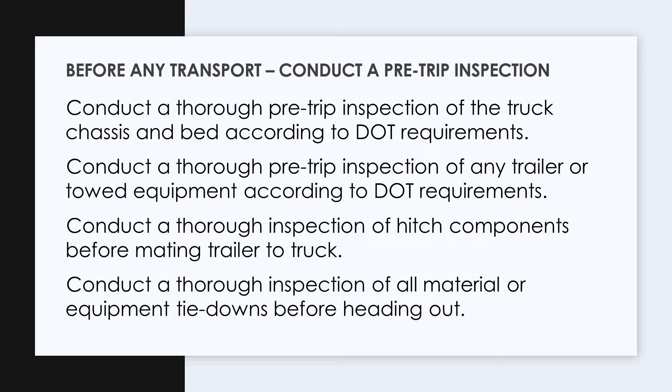We're going to put special emphasis on inspection and connection of pintle hook towing connections. These are among the most frequently used towing connections by utilities. They're a common heavy-duty towing connection, and they are not infallible. They can fail just like anything else, so they should be looked at closely, and you need to ensure their proper function and capability.

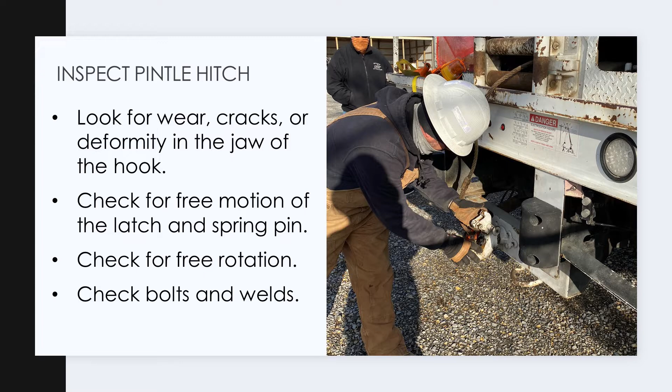First, inspect the pintle hitch. Look for wear or cracks or deformity in the jaw of the hook. Check for free motion of the latch and spring if it's equipped with one. Check for free rotation, and check the bolts and welds to make sure it's securely fastened to the towing vehicle.

Next, look for deformity or cracks in the ring or mounting base. The lunette ring is a critical component, and we'll talk a little bit more about how to measure that. Check for wear of the ring and check with an appropriate gauge. Also, make sure again you check bolts or welds. These are common fail points.

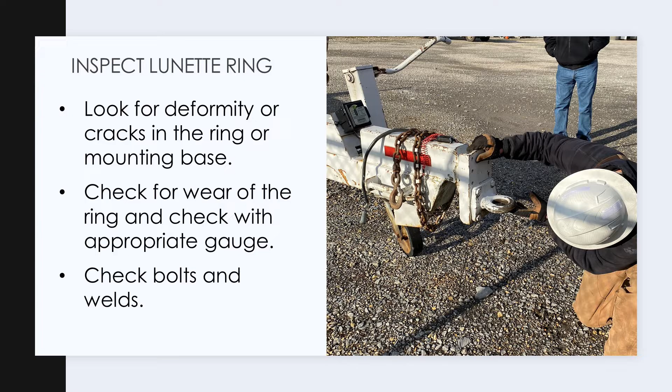A number of manufacturers and suppliers have for sale rings that are specifically designed for checking the wear and capabilities of lunette ring hitches. We do not promote any particular brand, but we do highly recommend that you obtain one or more of these gauges and use them regularly in your inspections. Keep in mind, this inspection is not just for your annual DOT inspection, it's for regular periodic inspections before use.

Check your safety chains and hooks. Check for wear or distortion of the chain links. Each and every link. As the old saying goes, a length of chain is only as strong as its weakest link. Check for excessive rust or wear at tow points or low points and attachment. The bottom of the curve is a typical drag point, and drag means wear, and wear means loss of strength. So you want to look closely at that section.

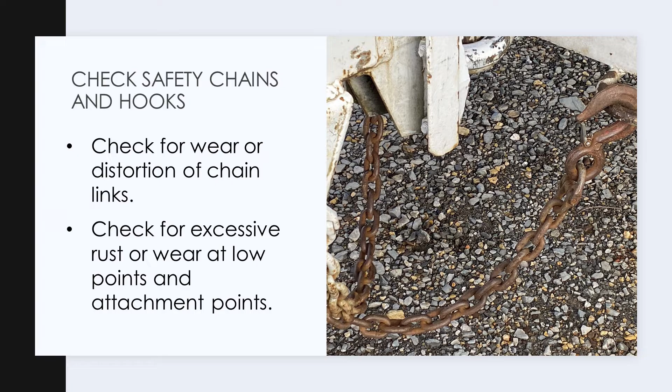Check hooks for cracks, wear, or deformation in the throat of the hook, along the shank, and in the eye. Verify the safety latch is in place and functional.

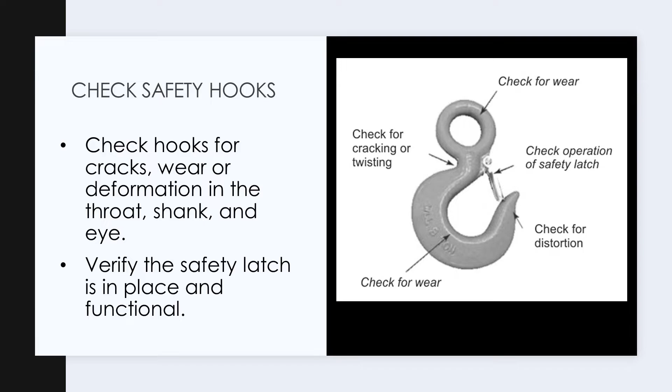Also, you want to check your connections. Ensure the chains are connected individually and securely. Cross the safety chains below the drawbar. Crossing of the safety chains provides a cradle so that if the tongue becomes detached, it will rest on the safety chains while towing and prevent the tongue from digging in and flipping the trailer.

Also, verify the length of the safety chains. There's been a recent change in National DOT policy, and rolling or twisting the chain in order to shorten it is a recognized and approved method for adjusting the length of the chain. Don't tie a knot in it, but you do want to roll it or twist it, or actually just have the appropriate number of links in the chain.

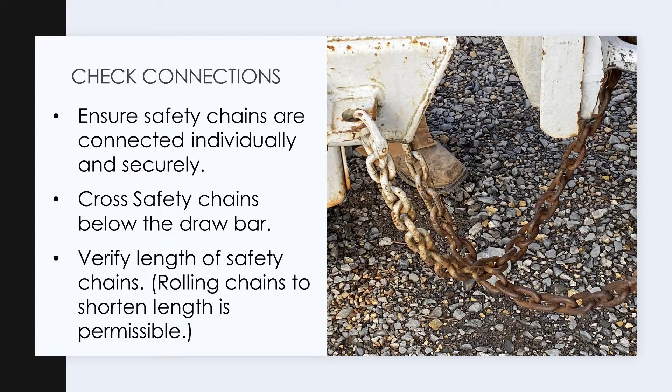Landing gear is a critical component of every trailer or towed vehicle. The landing gear keeps the tongue up when you're getting ready to hitch it. Be sure to fully stow the landing gear. Make sure it's completely swung or retracted. Use the provided locking pin or latch. If the locking pin is not functional, don't rely on a collar rope, chain, or strap to hold it. This could fail during transport.

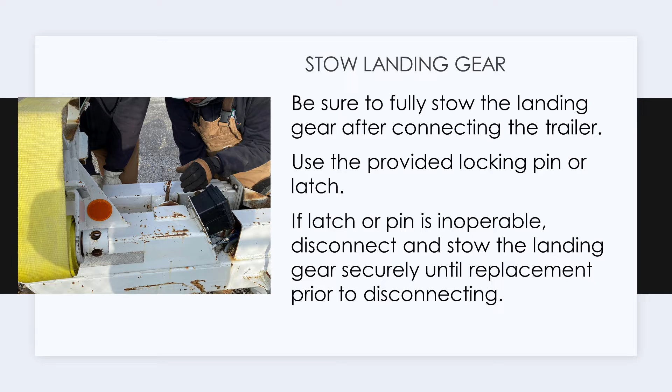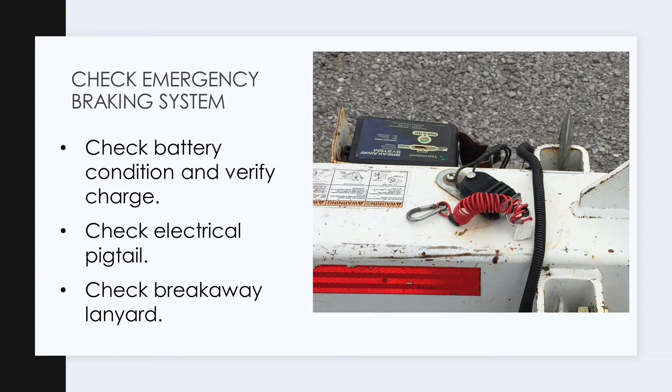Check emergency braking system. Check battery condition and verify charge. Check the electrical pigtail to make sure that it is in good condition and functional. And make sure that you check the breakaway lanyard, that it is in place and usable. Breakaway lanyard is a critical component of the braking system on the trailer. The last thing you want is a trailer passing you going down the road. There have been fatal and serious accidents that have resulted from the very same thing.

Likewise, in order to shorten the lanyard, don't wind it up or weave it through the safety chain. It needs to be a free and separate connection. You can either get one of the spring type connectors that takes up its own slack, or you can fold it back and use a clamp in order to make the connection the right length.

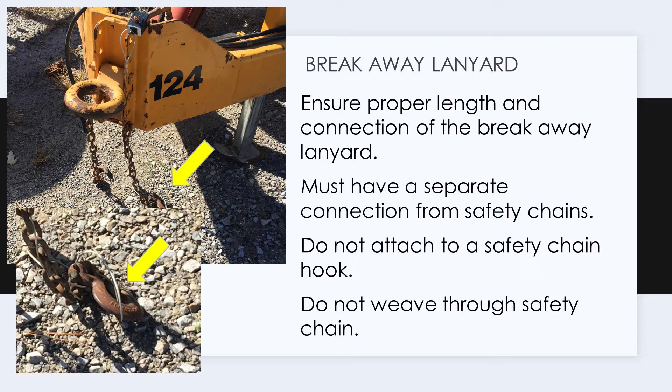Now we're going to move on to material loading, a few simple steps, specifically poles. We're going to be dealing with pole loading and hauling in a more lengthy program later on in the season, but right now we want to talk about just the very basics. And with any lift that you're going to make, especially with pole lifts, inspect your sling and verify the capacity. You want to attach the pole at the appropriate point so you have a good balance point. And then once you've got the pole on your towing vehicle, you want to make sure that you secure the load at both ends to make sure that it's in good shape.

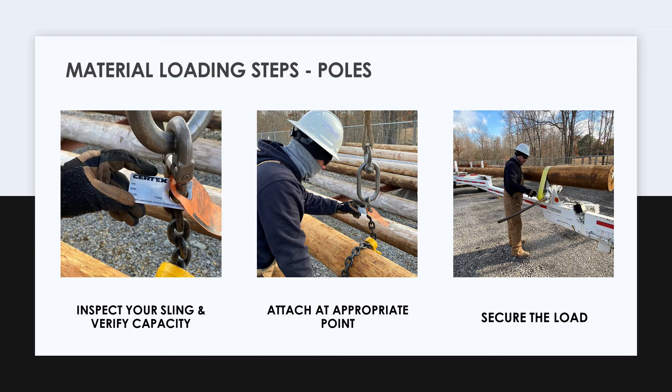Also, with an extended load, you want to make sure that you observe appropriate local regulations for marking and designation of an excessive length tow.

Materials, typically with transformers. Again, you want to inspect your sling and verify that the capacity is correct. OSHA regulations demand that the rating tag on the nylon sling be clearly visible and legible, so that you can tell exactly what the rating is on the sling. They vary from material to material and manufacturer to manufacturer, so you want to make sure that you get that right. You want to attach the sling at the appropriate points. You want to use a designated sling.

And it's a common practice to use a length of collar rope with a knot to make a sling out of it. JT&S does not recommend that, and it is not 100% in compliance. So use an appropriate sling for lifting and moving transformers. A length of so-called collar rope is fine for securing the load, but for lifting the load, you want to make sure that you have an appropriate lifting device or sling. And then secure the load in the cargo bay by whatever means you use. Some folks use a bolted secure frame. Some people use straps. Some people use a rope or other means of securement.

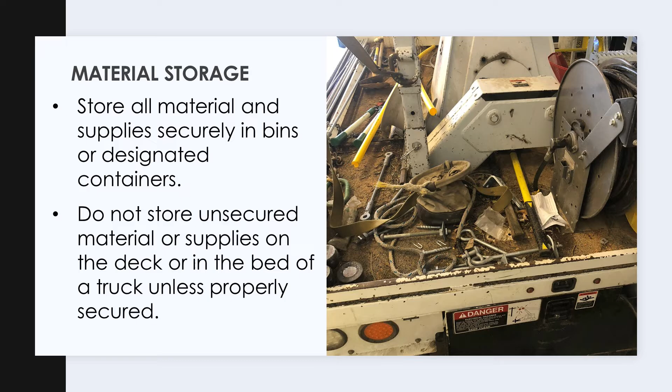Hauling equipment or material on a trailer requires securement that meets the Federal Motor Safety Carrier Administration regulations. More of us have equipment or material that we need to get out to the field now. We've got a lot of labor-saving devices and equipment that we get out there, a lot of new equipment that we use for access and difficult terrain. We can't just throw it on a trailer and throw a strap or a chain on it. We need to secure it properly and legally.

We've obtained a video from the Iowa Department of Transportation. This is available online, but it's an exceptionally good video with regard to the specifics. And these cover the federal regulations which apply for us here in Tennessee and in other surrounding states. As with all federal regulations, we have to at least meet these. And if there are any specific regulations that go above and beyond these, you can check with your local Department of Transportation or with the JT&S program or some other regulatory body. Be happy to clear that up for you.

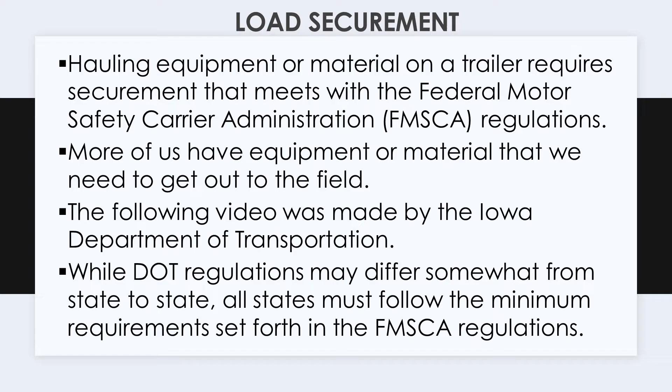But while DOT regulations may differ, all states must follow these minimum requirements from the Federal Motor Safety Carrier. So right now, let's watch this video, and we'll come back after the video is done.

Hi, I'm Officer Steve Robinson, Training Coordinator with Motor Vehicle Enforcement within the Division of Motor Vehicle, the Iowa Department of Transportation. We're here today to talk about chains and load securement, how to look at the chains, make sure you have the correct style chains and they're not damaged, and do a proper securement for a heavy vehicle. Before we start actually chaining down the piece of equipment, the first step is actually checking your chains over to make sure that they're not damaged and you have a proper type of chain to begin with.

Most of the chains that the Department of Transportation has are going to be 3/8" transport chain. And the way to check that is, first of all, you're going to measure the width of the strand, and then we're going to take a look at each strand and make sure that there's a marking somewhere on the strand that says G7, L7, or something with a 7 on it to show that it's a type 70 chain. If it doesn't have any markings on it, we have to take it back to what's called a type 30 chain, which is basically about a quarter of the securement value of a full length chain.

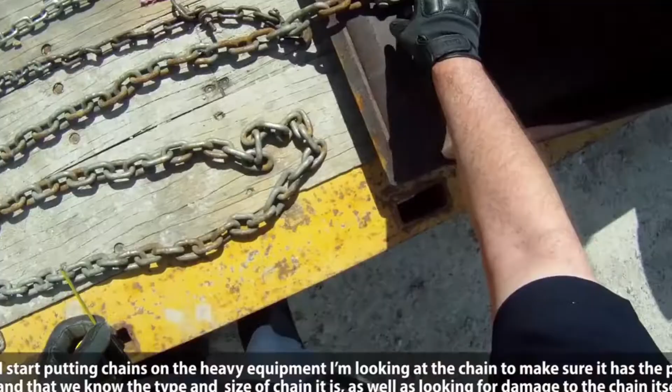Before I start putting chains on the heavy equipment, I'm looking at the chain to make sure it has the proper width, and we know what size and type of chain it is, as well as looking for damage to the chain itself. To start off with, we're looking for a marking on the chain, such as this RG7 that tells us it's a type 7 or 70, or in other words, a transport chain. And then we're going to measure out the width of the strand, at which point we're actually looking at about 3/8 inches there.

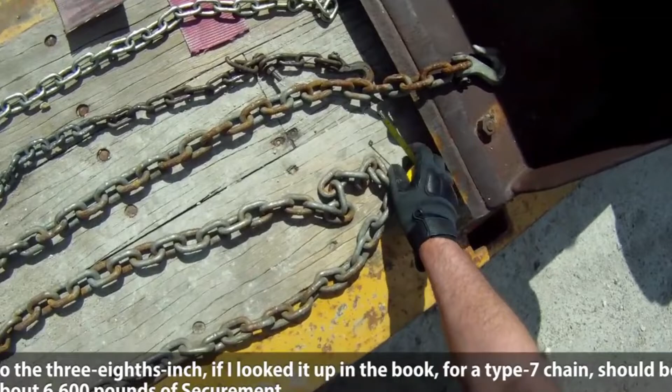So the 3/8 inch, if I look it up in the book, for a type 7 chain should be about 6,600 pounds of securement. If there's no markings here, we're going to take it back to like this chain over here. It has no markings on it, so we have to call it a type 30 chain. I also have several pieces of straps here. These are 4-inch straps. Unmarked straps usually get about 1,000 pounds per inch of width.

So a 3-inch strap would get 3,000 pounds, a 4-inch strap would get 4,000 pounds of load securement value. Any type of damage in it, especially for a 4-inch strap, we can have 3/4 inch of damage. Anything more than that basically violates the strap and it can't be used.

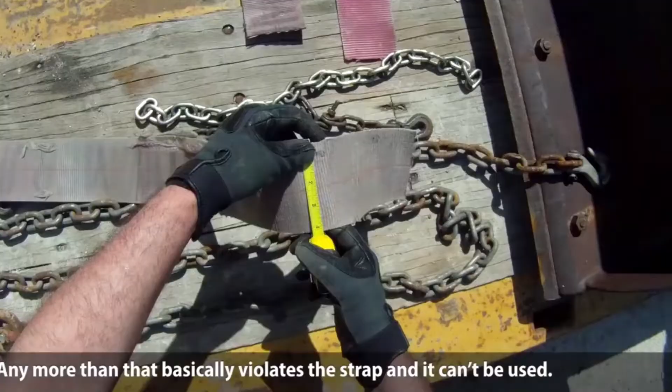These are 4-inch straps. You can use a 4-inch strap. You basically get 1,000 pounds per inch of width of strap. So the table would give us, unmarked, 4,000 pounds. If there's a marking on it that would say that it's valued at 5,000 pounds, we would give the value at 5,000 pounds as long as the tag was still attached to the strap and was legible.

Now this strap has a little bit of damage in it, a lot of damage in it, and there's more than 3/4 inch damage to the strap, and we're right at 3/4 inch damage there. This strap would be void and just needs to be thrown away or used for some other purpose. Shouldn't be used for your load securement.

Okay, we're looking at this smaller chain here. It seems to be in good shape. We're looking for the marking on it. So there's a G7, so it's the same type as the other one we were looking at earlier. We're looking at the width here. It appears to be 1/4 inch in width. It's a 1/4 inch type 7 chain. We'll use the book to look it up.

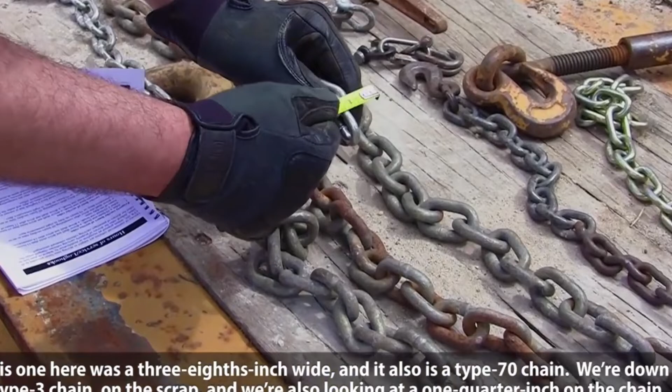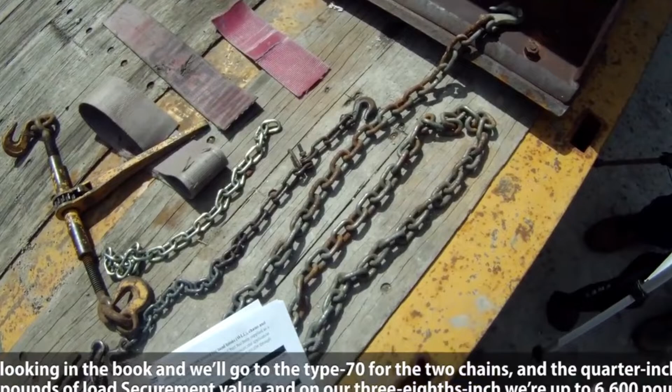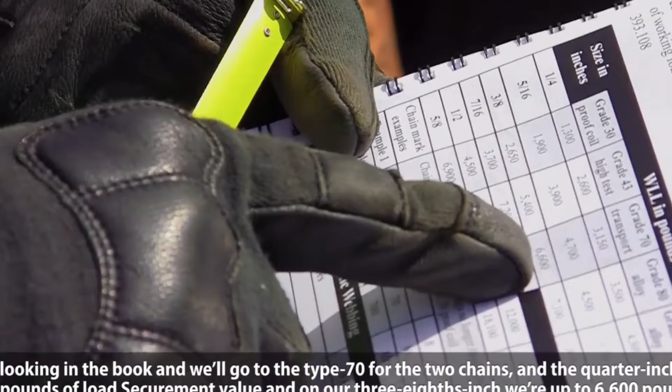When we're looking in the book, we'll go to the type 70 for the two chains. You can see the 1/4 inch gets about 3,150 pounds of load securement value, and then on our 3/8 inch we're allowed up to 6,600 pounds. On the type 30 chain, it was also a 1/4 inch. We'd only get about 1,300 out of it.

If we have an unmarked chain that we measured out at 3/8 inch, we would take that unmarked and move it all the way down to the lowest, the proof coil, and that only gives 2,650 pounds of working load limit. Other things I'm looking for in here: I don't see any type of damage to the links. I'm looking at the links side on so I can see that there's no twisting to them, and I don't see any type of stretching in the links. I'll show you a couple examples here in just a second of links that are twisted or damaged.

This does have a clevis splice on it, which is an acceptable repair. It's about the only acceptable repair that we'll accept to replace the original pieces. It has both cotter pins in place, and it also has both of the securement pins as well.

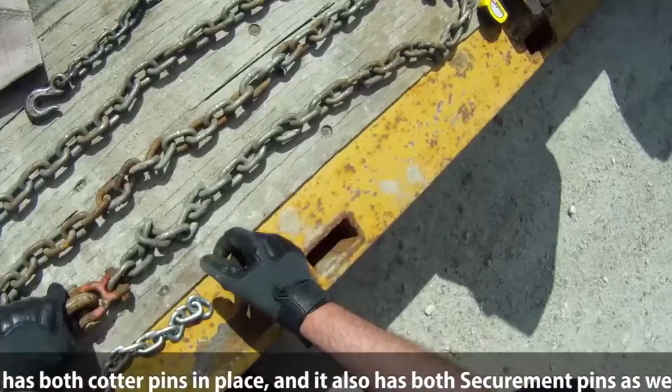On the other chain here, we're looking at several different repairs that are unacceptable and several different damages. You can see on this one that the link is twisted or bent. It's not going to be acceptable. We do not use bolts to repair links. It's also non-acceptable. You're looking for any type of broken links, again more bent.

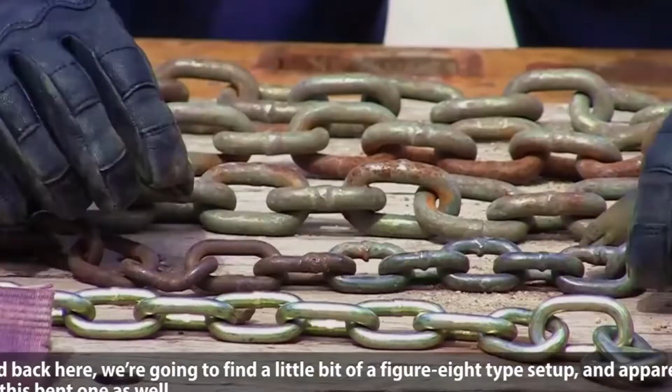And back here, we're going to find a little bit of a figure 8 type setup, probably on this bent one as well. You're going to see a little bit of a figure 8 setup, which means that link has been stretched out, and a stretched link is not acceptable either.

We've got several different types of repair items here that are common and sold at stores, but they're not acceptable for load securement. The first one being a weld link or a lap link. The second one here appears to be a cold shut link. Anytime you've got to hammer your pieces together, it's not acceptable. The next piece here is called a quick link. It's not acceptable.

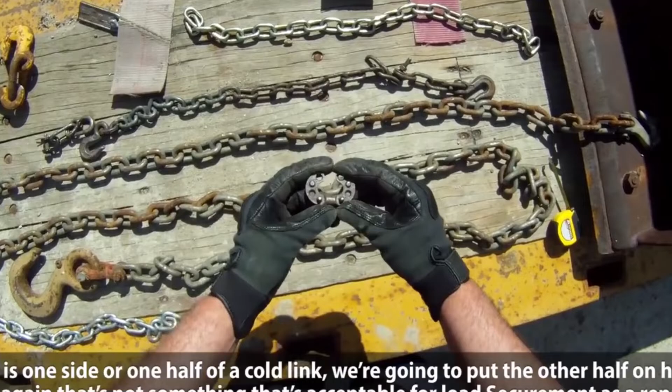And it looks like we got half a clevis here. The half clevis would be okay for a certain amount of your repairs. Got one more type, which would be a quick link. This is one side or a half of a cold link. We're going to put the other half on here. Again, that's not something that's acceptable for load securement as a repair.

The last thing we'll discuss is we already looked at the table for the chain. If the chain already has a tag on it that tells us what the load securement is, we'll find usually a stamp inside here that will tell us how many pounds it's secured for. As long as that tag's still attached to the chain, we'll go ahead and use whatever value is listed on there.

Okay, we're going to start off by putting chains on. With a heavy piece of equipment that's over 10,000 pounds, we need a 4-point tie down and a direct tie down method. So we're going to start off with Tim putting the chain on. We would like to get it at a 45-degree angle if at all possible. You're going to see this first attempt is probably not going to work out too well for Tim.

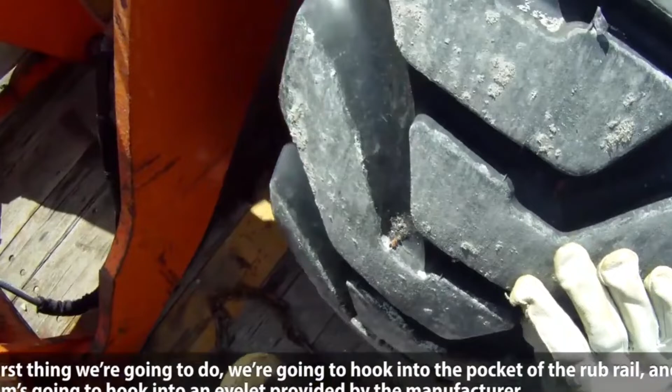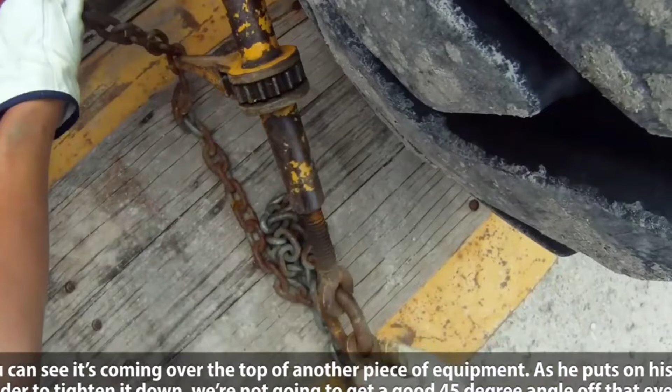First thing we're going to do is hook into the pocket of the rub rail, and Tim's going to hook into an eyelet provided by the manufacturer. You can see it's coming over the top of another part of the equipment. And as he puts on his binder to tighten it down, we're not going to get a good 45-degree angle right off that eyelet. It leaves a lot of opportunity for the device to loosen up and cause problems. So it's not a good securement method.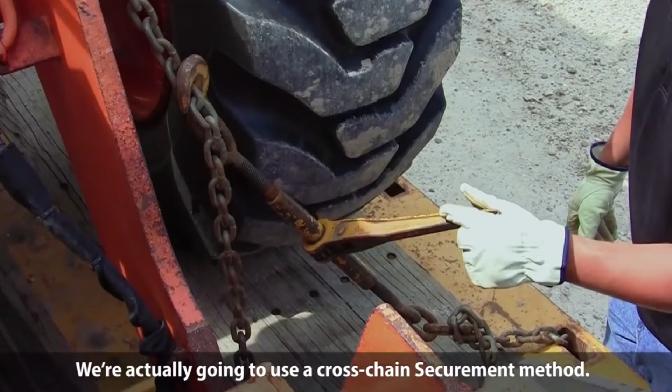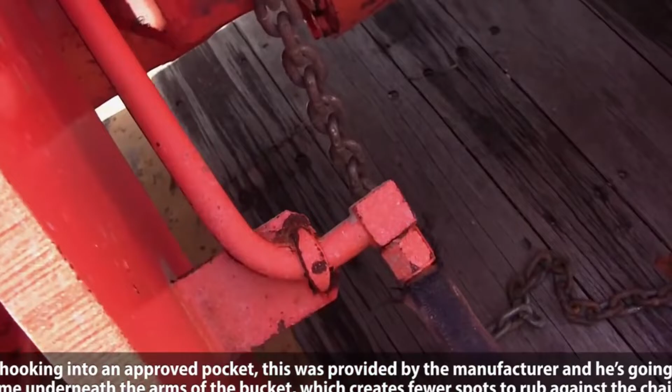We're going to actually use a cross-chain securement method. Tim's hooking into an approved pocket. This is provided by the manufacturer, and he's going to come underneath the arms of the bucket. Creates fewer spots to rub against the chain. He's also using a side pocket a little bit further out to get a better 45-degree angle tie down off of it.

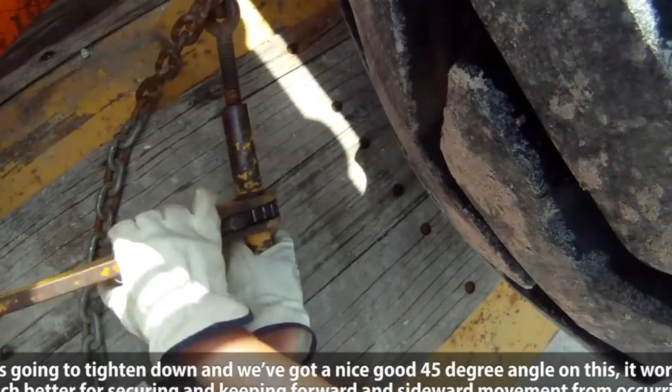As Tim hooks this in, you notice he's going around the whole link and not trying to put the hook inside the loop of the link. He's going to tighten down, and we got a nice good 45-degree angle on this. It works much better for securing, keeping forward and sideward movement from occurring.

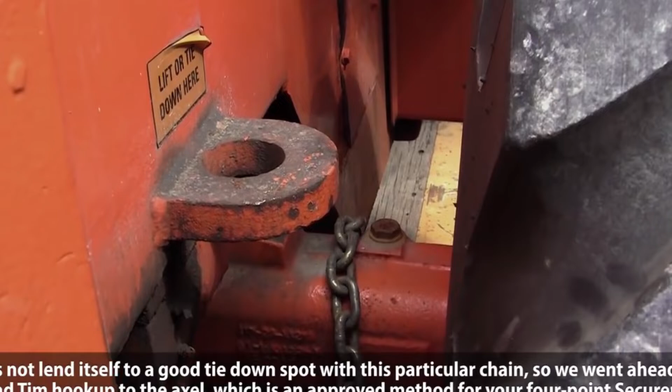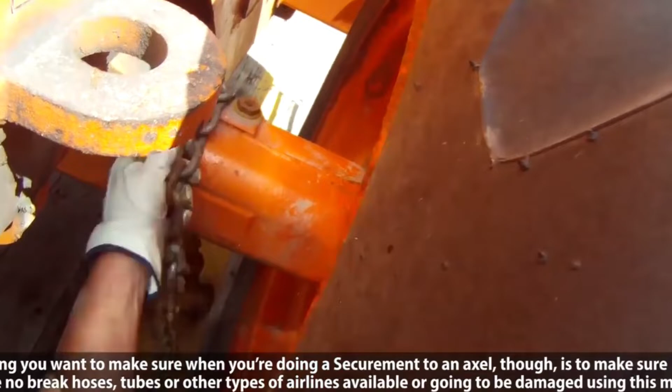You notice we have a hook point here provided by the manufacturer of the heavy equipment. It does not lend itself to a good tie down spot with this particular chain, so we went ahead and had Tim hook up to the axle, which is an approved method for your 4-point securement. One thing you want to make sure when you're doing a securement to an axle, though, is that there's no brake hoses, tubes, or other type of airlines going to be damaged using this method.

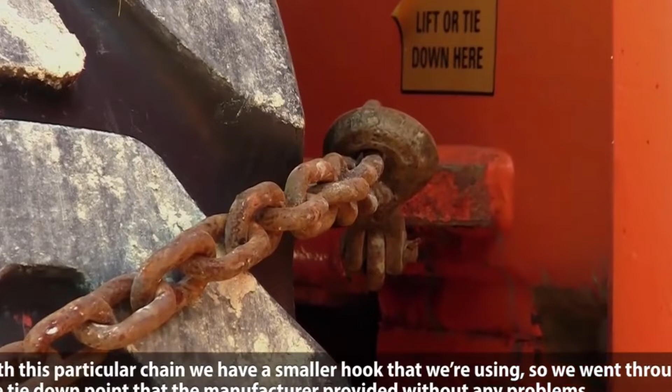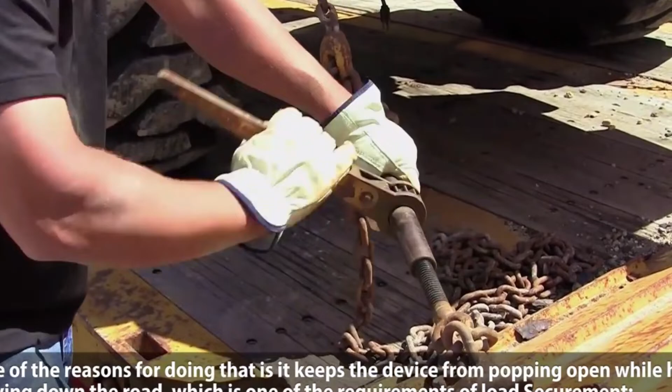Okay, with this particular chain, we have a smaller hook, so it went through the tie down point that the manufacturer provided without any problems. So we'll go ahead and use the tie down point versus using an axle. Tim's going to rehook this with his ratchet device pointing down against the deck, against the back of the trailer here. One of the reasons for doing that was to keep the device from popping open as it's driving down the road, which is one of the requirements of our load securement.

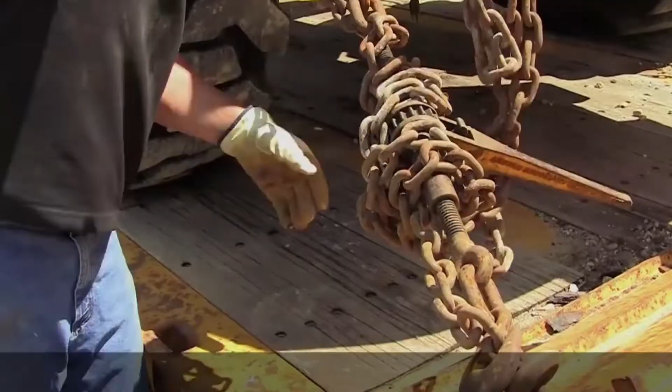We need to make sure all our chains and load securement items are not capable of opening up while in transit. What we're doing with the extra chain here is so it doesn't pop out off the side of the vehicle and possibly damage a car driving by. And it also supplies a securement method for the ratchet not to come unhooked while it's going down the road.

Here we have two chains that are just too short to make the securement work. A lot of people would go ahead and try to make one longer chain out of the two chains, and that's not an acceptable method. You cannot interconnect chains to make one longer chain.

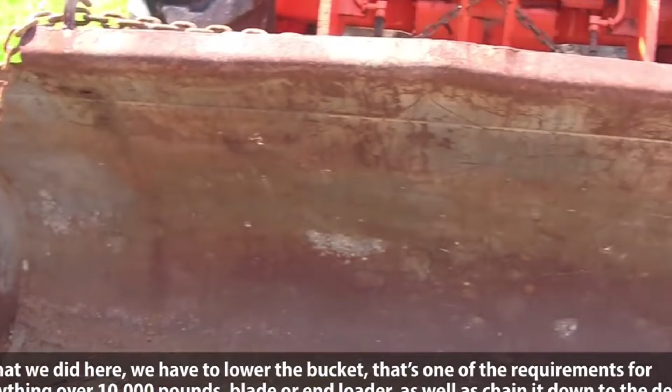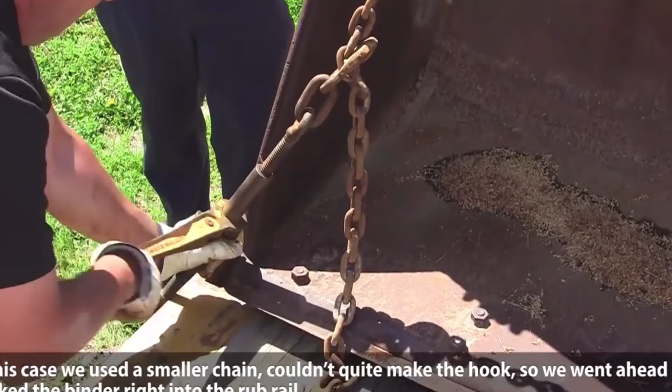What we did here is we have to lower the bucket as one of the requirements for anything that's over 10,000 pounds, blade or end loader, as well as chain it down to the deck. In this case, we used a smaller chain, couldn't quite make the hook, so we went ahead and hooked the binder right directly into the rub rail, which is an approved method as long as the rub rail doesn't have any damage and it stays tight.

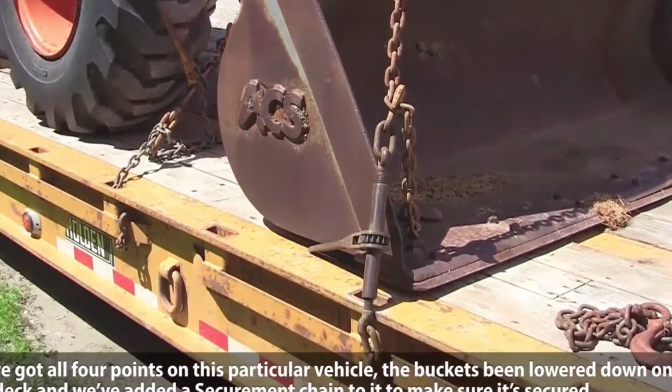We've gotten all 4 points on this particular vehicle. The bucket's been lowered down to the deck, and we've added the securement chain to it to make sure it's secured. A couple of things that we're going to do is we're going to make one final check of the equipment to make sure that everything's secured down properly. The first thing I've noticed when I did my walk around on this is the chain is not tight. We're going to make sure that we either tighten this back down or grab another loop or two to make it tight.

Then on the back here, with our tie down, one of the reasons we want to do a 45-degree angle is we've got to prevent movement up, down, left, right, and backward and forward. And with coming back to the back here like this, we didn't get that 45-degree tie down, so we'll still prevent backward and forward movement, and to a certain extent some side-to-side movement, but we're not going to be able to do a lot with the up and down movement.

We're not getting enough pressure on the downside to make this work. It'd be better if we could hook it into this pocket. If that's the case where we can't reach that pocket, then unfortunately we'd have to unhook everything and move the loader forward so we can get that 45-degree tie down.

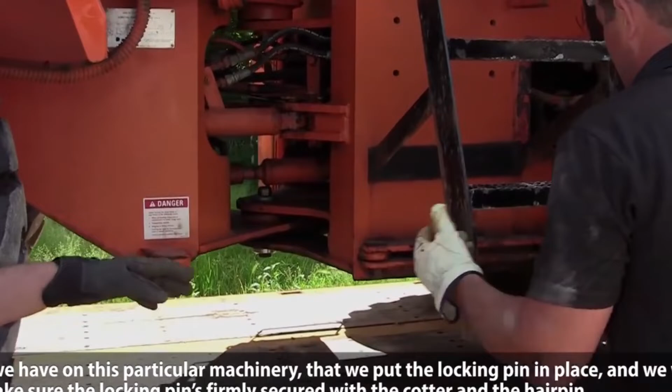Okay, one of the last things we need to do for load securement is when we have a piece of equipment that articulates side to side, we need to make sure that if we have a mechanical locking pin like we have on this particular machinery, that we put the locking pin in place and make sure the locking pin's firmly secured with the cotter and the hairpin.

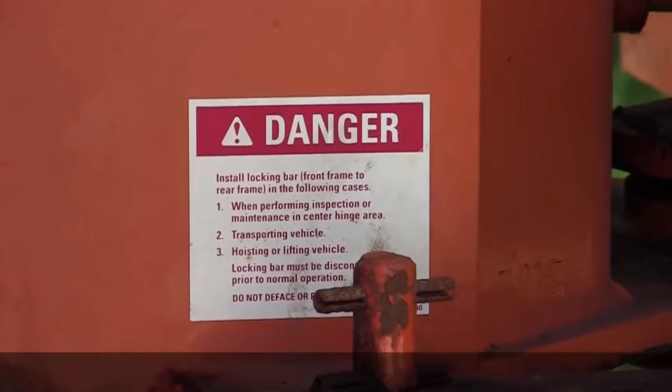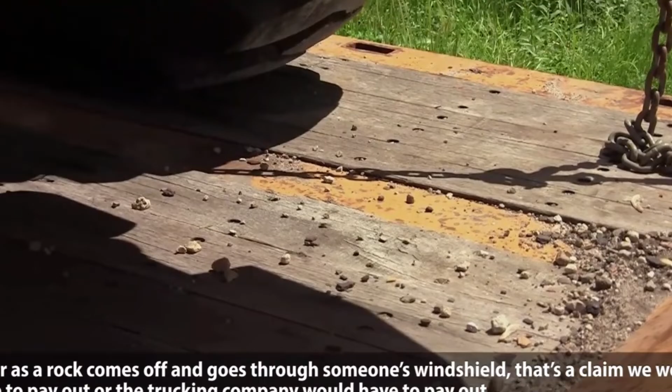The last thing we're going to look at when we're doing our walk around before we drive away with this vehicle is we want to make sure that any rock, dirt, and other heavy debris is swept off the deck here. Use a broom, hand, whatever you need to do to get rid of as much of it as possible. This is one of the biggest complaints the DOT gets, as far as the rock comes off, goes through somebody's windshield, and it's a claim that we would have to pay out, or the trucking company would have to pay out.